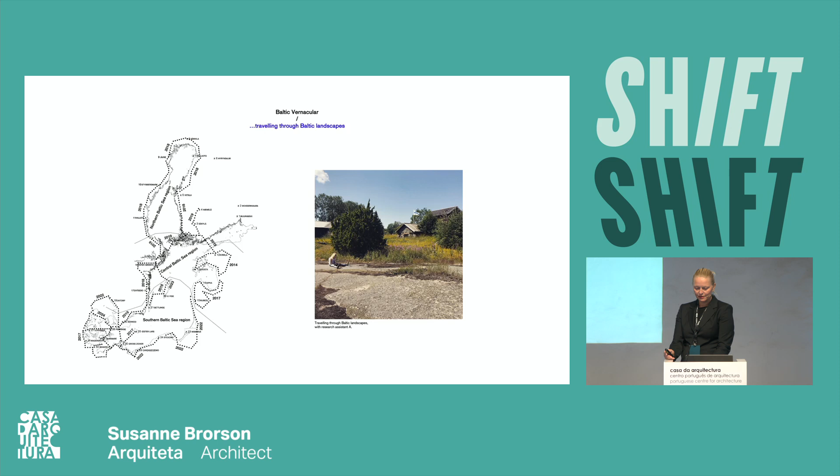Islands started to emerge as especially interesting. Limited in size, there was always—rather often—only a limited or specific palette of materials available, going hand in hand with local knowledge and craftsmanship.

One very good example is the small island of Faro in Sweden, next to Gotland. There, roofs are typically thatched with a special cutting grass, ag or Cladium mariscus, that grows on the island. It needs to be cut regularly, otherwise it overgrows the meadows where the sheep are grazing. So this material is used for thatching or roofing.

In summer '23, I had the opportunity to join a local home building union, if this is correct, for the annual mowing of one of the island's meadows.

Drawing, or the repeated redrawing of the 32 case studies, by simultaneously analyzing photographs for information on context and landscape, helped me understand how these buildings were embedded in their landscapes, and I started to imagine how people lived in them throughout the year and throughout the seasons.

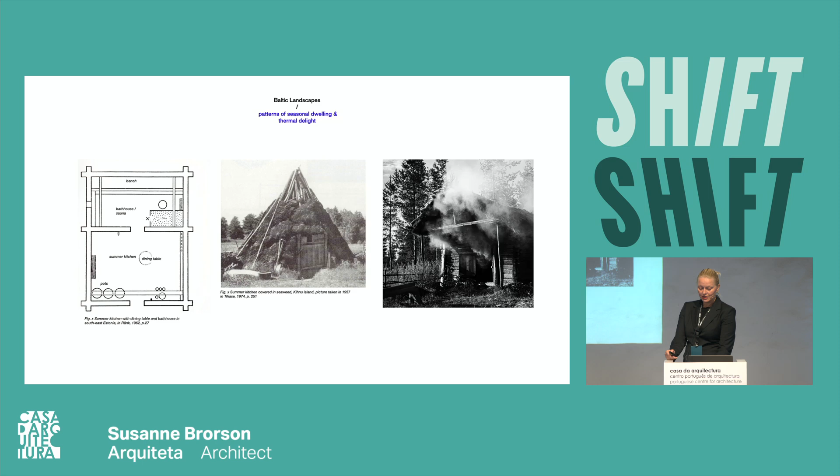How climatic, but also how atmospheric qualities of Baltic vernacular architecture were created, was part of my research as well.

So which materials support certain climatic or architectural atmospheres, how they feel warm or cold, or are they black and white, so how do they receive solar radiation. And of course also phenomenological things like the smell of pine tar or the smell of seaweed, grass and fern.

Baltic landscapes as resources for building materials. The vernacular architecture, or the architecture of the poor, is on the contrary very rich—not only rich in knowledge but intelligent in understanding all these complex entanglements, or the relationships that Carlo Scarpa spoke of.

What I think was one of the most significant findings of my research is that vernacular architecture was very experimental, developing over centuries through a trial and error method, each time trying to improve and make something better, always aimed at knowledge generation, presented and documented to the architecture itself as epistemic artifacts.

Parallel to my research, I established the Baltic Vernacular Experimental Laboratory, a teaching format starting in 2017. It has traveled with me through several universities around the Baltic, so I've been using my findings from research to test and experiment with students through teaching, through various formats, engaging in design research, design experimentation, but also a lot of one-to-one built material and spatial experiments.

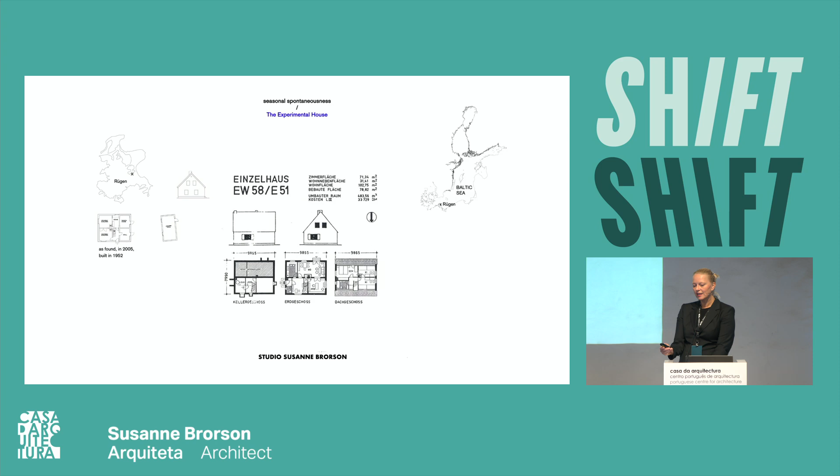Over the years, I've experimented with climatic design principles extracted from my research, aiming to recontextualize and climate-adapt this building. Besides the general refurbishment, interventions were actually very small, partly a question of budget. One of the most prominent changes was the erection of a wall between the two houses to the north, creating a wind-protected courtyard and, through that, a microclimate—it's always a few degrees warmer than in the surrounding gardens.

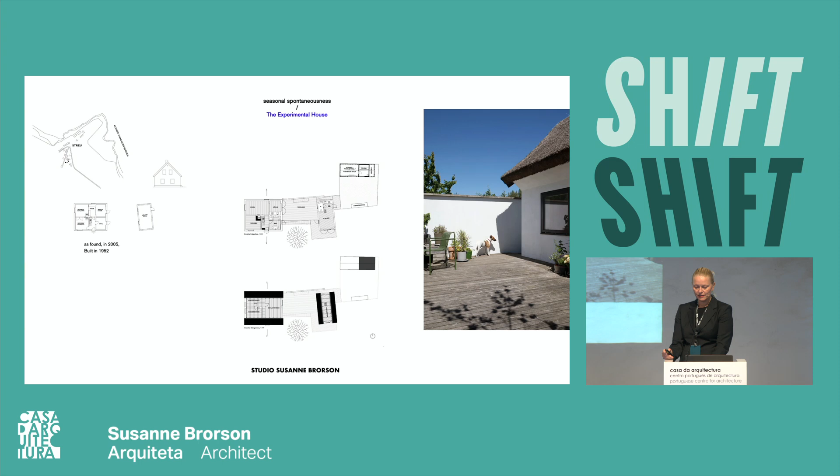The material palette is very simple. The roof is thatched with reed from a lagoon close by, there are timber floors, the same timbers used on the floors in the house and also outside, and the walls are painted with local chalk paint.

A later addition to this experimental house is a small building at the rear, the black-white house, playing on the albedo effect, and it's actually also a seasonal typology. It has an insulated black space, which is a sauna and a summer living room, so you can sit in the garden and work and eat while it's very windy and probably rainy outside.

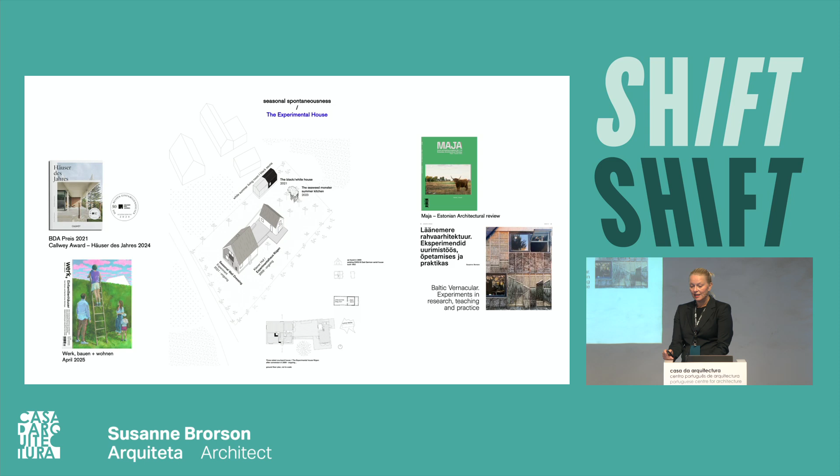A lot of experimentation has happened around this experimental house. It has won quite a few awards and has been published a lot. In this axonometric drawing, you can see some of the experiments that happened around this house as part of the experimental laboratory: the seaweed kitchen in the back and the black and white house. In front, on the western gable, you can see another experiment that has been going on for four years now—seasonal wall dressing—that I would like to introduce a little bit more.

I was quite interested in trying this out. I could not really understand how this worked, but I wanted to play with the aesthetics of natural materials. So I started an experiment to turn the western gable of the experimental house into one big loom, into which several natural materials could be woven, very much inspired by the beautiful textile art by the Bauhaus artist Gunta Stölzl.

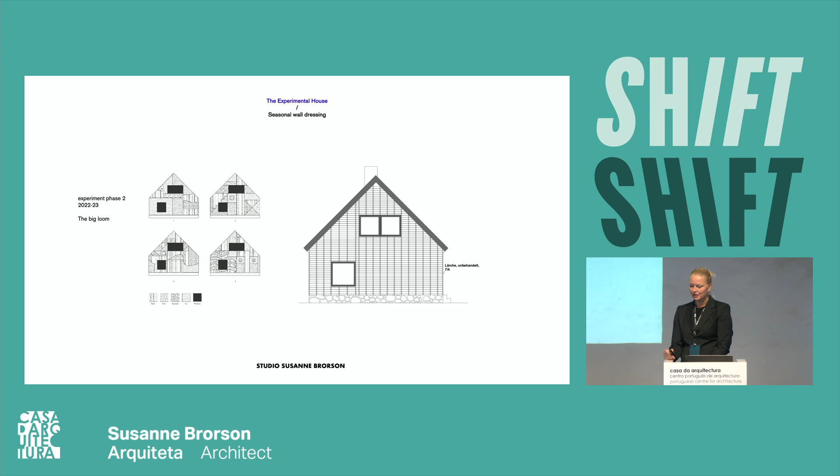So we turned the western gable of the experimental house into a big loom, putting a framework of large battens with wire running across. And then we were testing beforehand which patterns for the seasonal dress we could create using several available local natural materials.

And then we started a summer workshop, or island workshop, with students from RISEBA University Riga, and we've been weaving the facade dress with materials that we found close by, so garden weeds, seaweed, grass, reed, but also off-the-shelf reed mats. This is how it looks now.

The seasonal wall dress was also presented at the Constructive Disobedience Conference, and there's a beautiful publication. It was also part of the Slovenian pavilion at the Architecture Biennial in '23, '+-1, in search of well-tempered architecture.

Every year, the seasonal wall dress has to be taken care of. In '23, with students from Hamburg, and last year, 50 students from the Royal Danish Academy in Copenhagen came to weave the facade dress.

A project, so I'm not only experimenting with things like that, is a project that was completed with my office, the Eco Village Rügen. It's actually 9 prefabricated timber houses that are built on a former agricultural co-op site.

It's rural cohabitation, really, so it started off with a number of people who wanted to build there, who wanted to share certain things, and who wanted to build as sustainable as possible. And the site was heavily contaminated, so this project actually helped to regenerate this landscape.

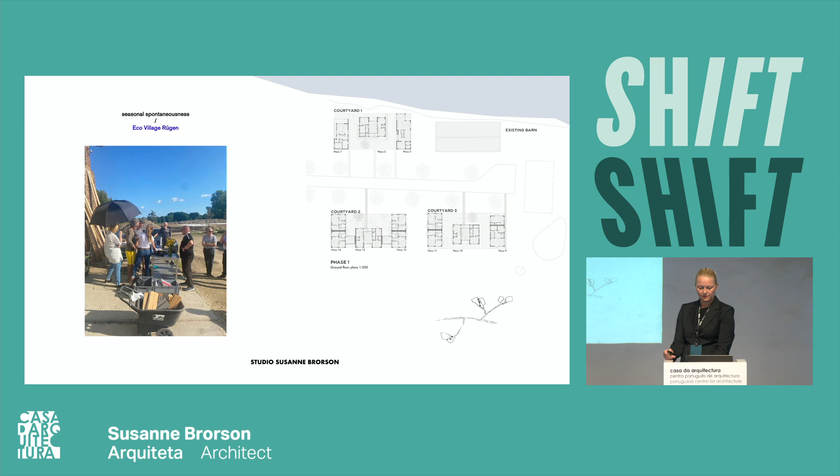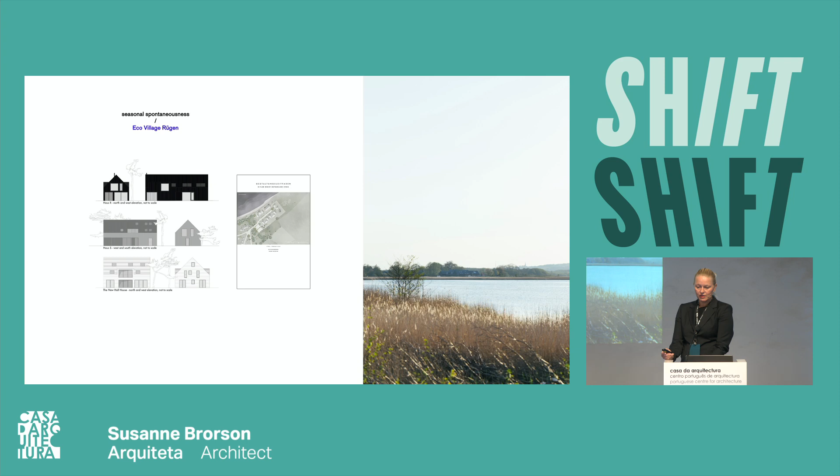A binding design guidance that everyone had to sign up for was stating sustainable building materials, so the timber construction, but also timber facades, mostly untreated and carbonized timber facades. And the design guidance also gives construction build-ups, so very simple construction build-ups.

The idea was also that some families could finish off the houses themselves, so they would just commission the structure, the facade, and the roof. And it all happened during COVID.

First we wanted to build with CLT timber from Austria, and because of COVID, prices went up. We could actually only realize this project through this modular approach. It's based on 2 typologies only. In the end, we ended up working with a local sawmill and building everything in timber frame.

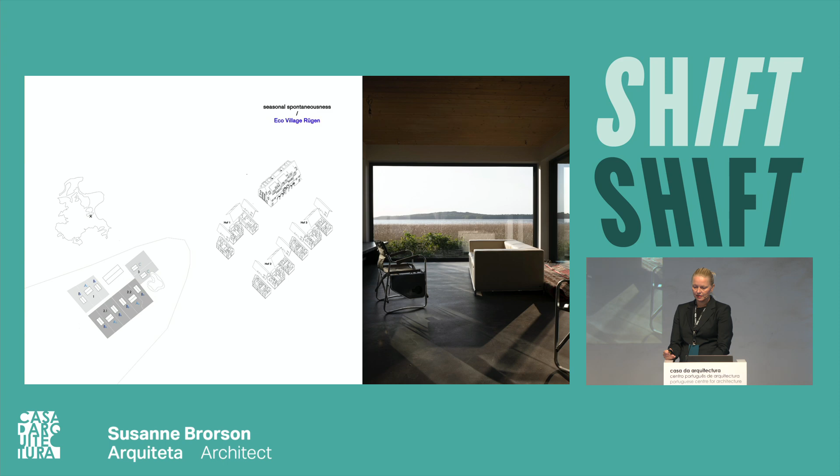There are several shared facilities, a communal garden, workshops, also an electric car that people can use. And there's also a small summer kitchen from recycled materials on the site.

One thing that I had to try out, of course, is seasonal dwelling in these houses, which very much relates to the specifics of island life. People live completely different in summer than in winter, so there's a main unit to the left and another unit to the right that could be rented out as a holiday flat, or it could be an office.

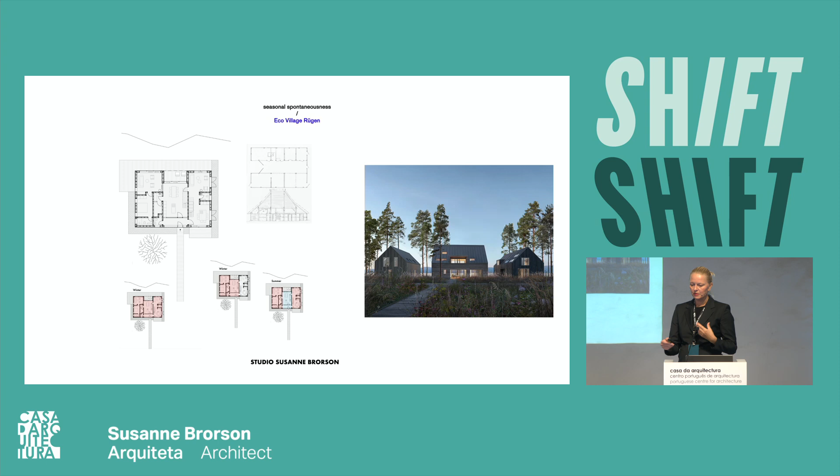In the middle, it's a central space. It's a kitchen and living that you share, and you can open up completely in summer, so it becomes an external covered space. The design guidance actually also forbids things like fences, carports, or funny garden sheds, to allow nature to grow back naturally into the site.

Towards the end, I will quickly show you a small project, a very small project, which I would maybe not really call artistic, but it's more of a spatial inquiry. It's a traveling pavilion, the seasonal salon, passing through different bioregions or landscapes on its way from Rome via Rügen, the island that I'm living on or based on, to Riga, so to the Baltic Sea region, where it has arrived this summer.

And it's actually also a method. I called it Knowing Through Making, the Seasonal Pavilion as Framework for Experimentation, which was presented at the Conference for Bioregional Architecture and Design Practice at TU Munich last year.

So it started off its journey at the German Academy in Rome in June last year, where it was dressed in grass from the park of the Villa Massimo, so biogenic leftovers from an urban context. But also with another traditional building material from Italy that I had no idea of, called stramma, or rope grass—a very unfamiliar image for me to imagine Italy with houses thatched in grass.

Anyway, and of course I found Alberto Scano. I have a talent for finding these people in the Pontine marshes between Rome and Napoli, who showed me how this worked. It was also a student project, a design-build project with students from Rome, so a modular structure on floatable pontoons that could move through Europe.

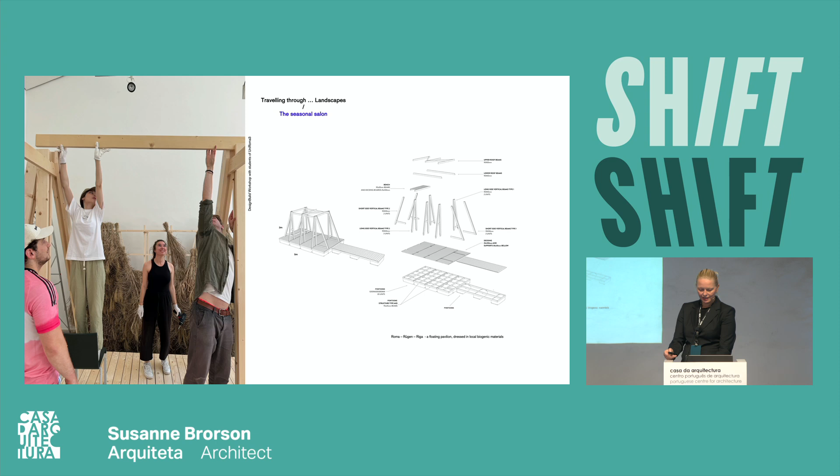And it made its first appearance at the Art Fest in Rome, also dressed in grass, where the beekeeper Erika has her bees flying around, so the pavilion actually smelled very much like the honey was tasting.

It then moved to Stuttgart and stayed two months in the heart of Weissenhofsiedlung, opposite Mies van der Rohe, and it was dressed in several types of grass.

So a new summer dress was woven with grass from wetted peatlands close to the Alps, with students from KIT Karlsruhe, and then it moved to Rügen this May with students from the Academy of Fine Arts in Vienna, where I'm teaching right now, and we worked with another bioregional material, reed.

A big discussion followed in the end, a panel discussion, and it was also part of the Women in Architecture Festival. So we're talking about situated approaches in bioregional architecture.

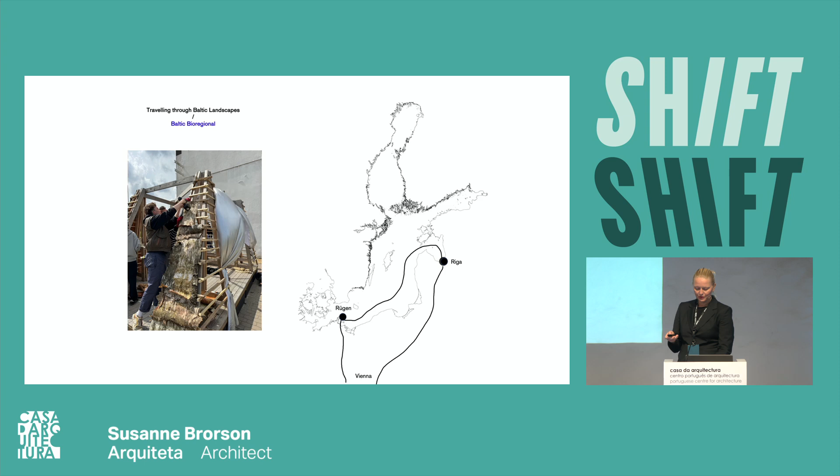The reason we went to Riga was because of a combined design studio between the Academy of Fine Arts and Riseba University in Riga, engaging with what I would call future Baltic landscapes.

And we were looking into peatlands. We have a lot of peatlands in Northern Europe, which have been drained historically. The rewetting of these peatlands has a big potential as CO2 storage and to slow down climate change, and of course to grow building materials on these rewetted lands.

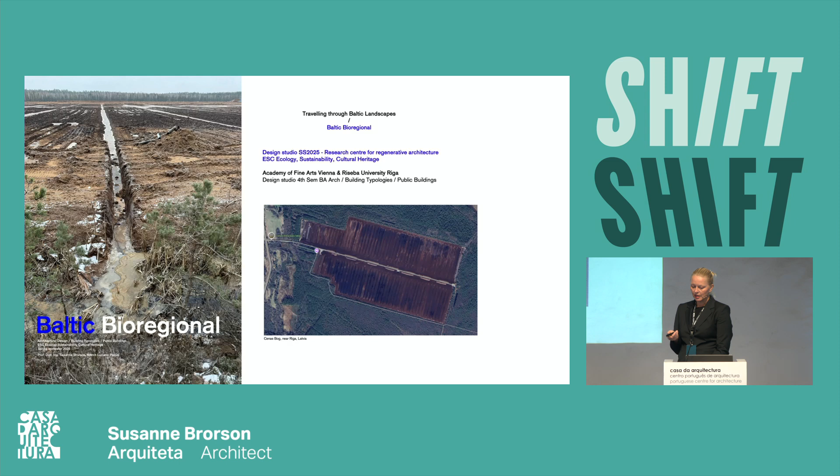So these two design studios, working as twin studios, were exploring this approach, investigating the materials that we could grow on rewetted peatlands. These would be, for example, reed, moss, typha, and other materials that have been traditionally grown, but also materials that in the future we can use in construction.

The challenge is to think architecture together with landscape—how does a building work or develop as something grows around it? How can the material become part of, or the architecture initiate processes of transformation, not only in architecture but also in the regeneration of landscapes.

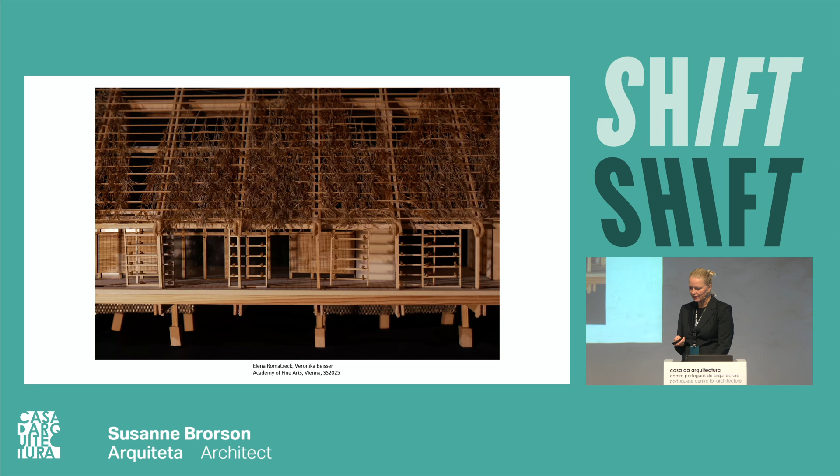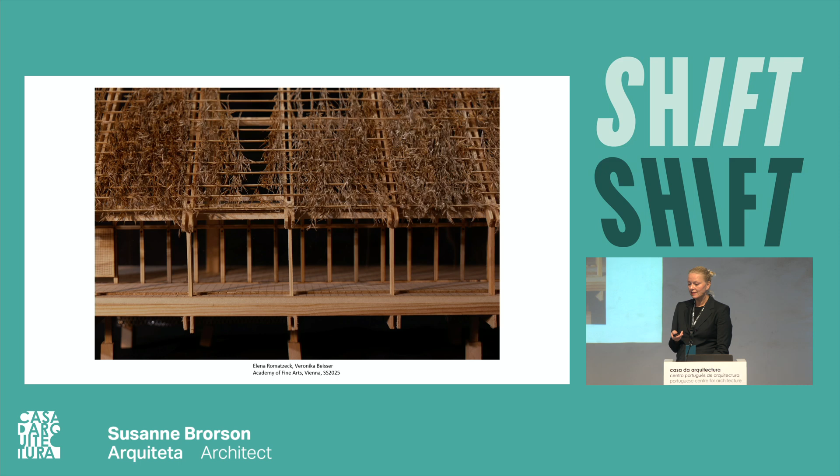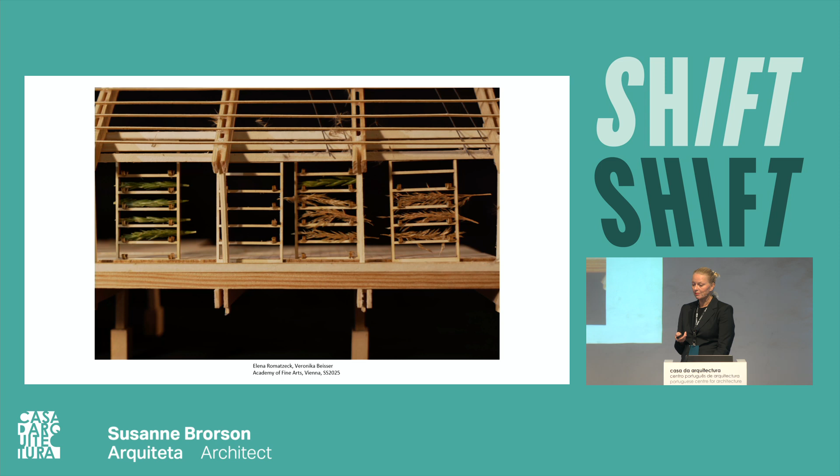So you have to think of what happens in spring: who is planting plants, where do they go, where are they harvested, can they be dried, and can this drying process become part of the architecture? Can it become part of the facade, the roof? How is it then taken away, maybe sold? And how do local communities and economies actually benefit from these kinds of projects?

And of course, it's not only about traditional building materials but also future materials. These two students were looking into membranes or textiles made from grass that grows in rewetted peatlands—a future outlook onto how we can see architecture.

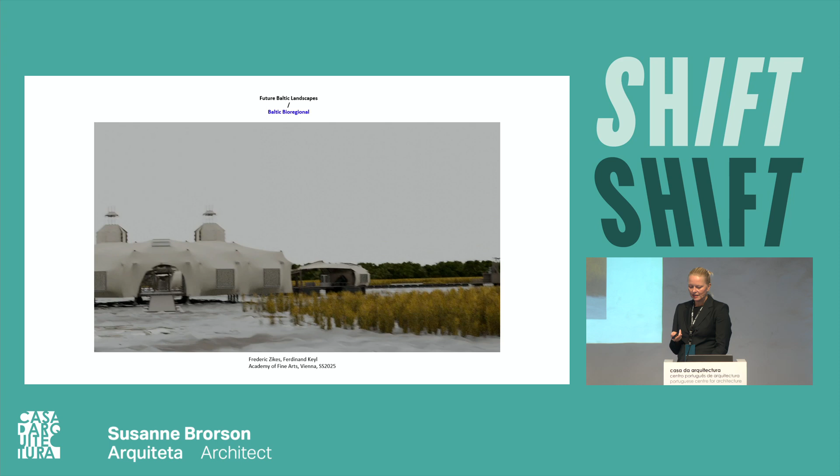And this is, of course, an idea of a project where it can be moved. It's a temporary structure that can maybe move to different landscapes and help regenerate them.

Okay, I'm playing this now.

Towards the end, these student projects are also some form of research, and they have been presented in an exhibition as a side event to a big conference happening this week, which we have been discussing since the beginning of the week—the RRR 2025, Renewable Resources from Rewetted Peatlands.

And the exhibition is still open. I don't know if any of you are in that part of Europe. It's shown at the Caspar David Friedrich Institute. So thank you very much.

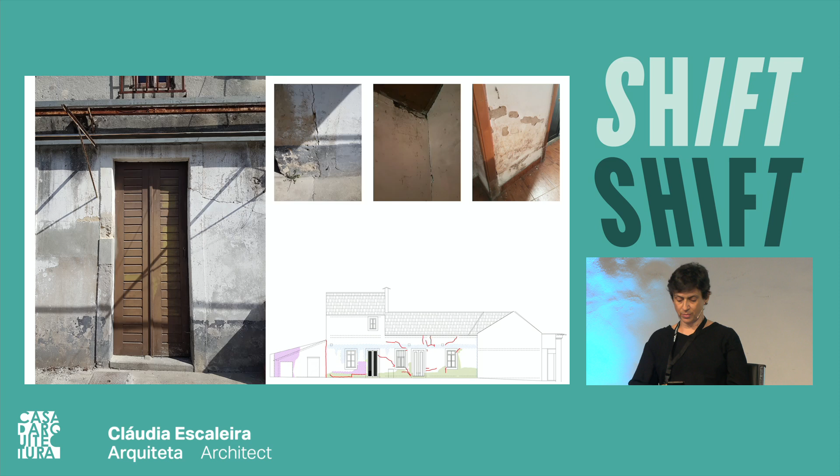I was excited about the promises of change brought about by these discussions. I was so naive. The practice in architecture studies quickly demonstrated the difficulty and resistance to applying what had already been recognized as necessary. These concepts were not a priority in building design. A feeling of unease settled in, one that has been with me ever since.

While still working in an architectural practice office, I returned to university to address the two topics that linked my concerns: building renovation and sustainable construction. Regenerative future was not a concern then.

Studying more freely, disconnected from current practice constraints, made it possible to go deep into questions such as: what are the impacts of building materials in resource depletion, what are the impacts of building materials in waste generation, but more importantly, if we already knew the problems, what strategies were being proposed so that future building operations—renovation, new construction, addition, and so on—wouldn't raise the same issues.

I was seduced by the rational perspective that one of the deeper problems of materials were the joining and connecting methods used to put them together, as they didn't allow future separation. Therefore, designing buildings with reversible connections and joints was the solution to follow. By designing reversible connections, building components and products would be easily separated, allowing for their reusability, prolonging their useful lifetime, reducing the amount of waste sent to landfill, and reducing the need for sourcing new materials.